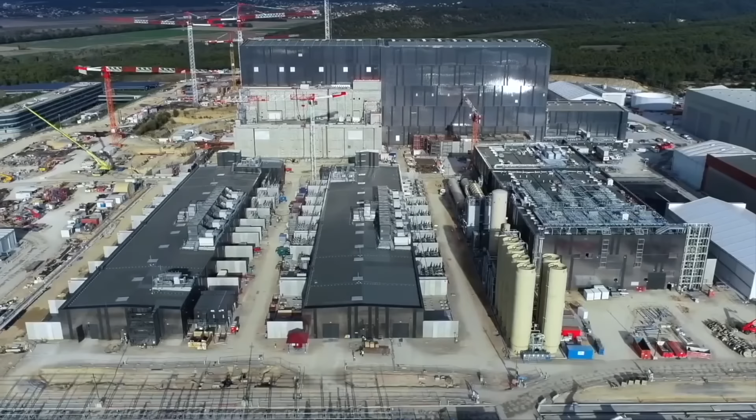From enormous nuclear reactors to international pipelines and megadams, nothing shows the power of construction quite like an energy megaproject. With massive scale and even bigger impact, these schemes quite literally power our world. Sit back, relax, and get ready to take in some of the biggest energy megaprojects from around this planet.

It's an immense project. Since 2005, Finland's been constructing the largest nuclear reactor in Europe, alongside a facility that could solve the problem of what to do with spent nuclear fuel. When you think nuclear, the Nordic nation doesn't immediately jump to mind, but if all of its planned projects come to fruition, then by the end of the decade, the country will be second only to France in terms of the percentage of energy drawn from nuclear systems.

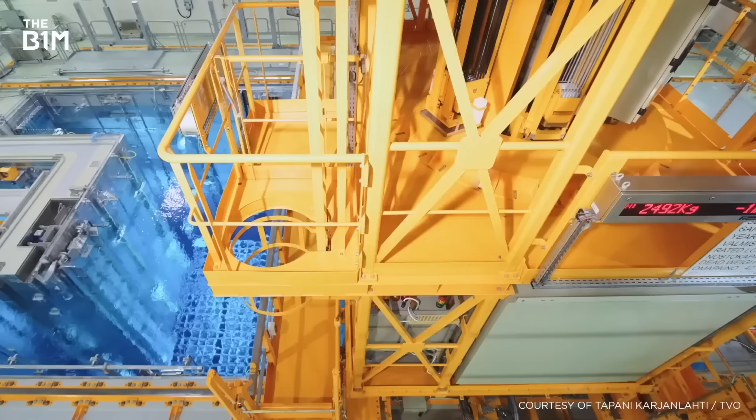After more than a decade of delays and cost overruns, 2022 will see the world's happiest country switch on one of the planet's most advanced reactors, potentially kickstarting a new age of nuclear power. Finland actually has a long history with nuclear power. Its first reactor came online in 1977, and by 1980 3 more were operational, providing a third of Finland's total energy needs.

While these reactors are among the most efficient in the world, running at a 95% capacity factor for the past decade and continually being uprated over their life cycle, growing demand and the seasonal fluctuations of other renewable sources like hydro and solar has left the country relying on imports from Russia and Sweden to make up the balance of its energy needs.

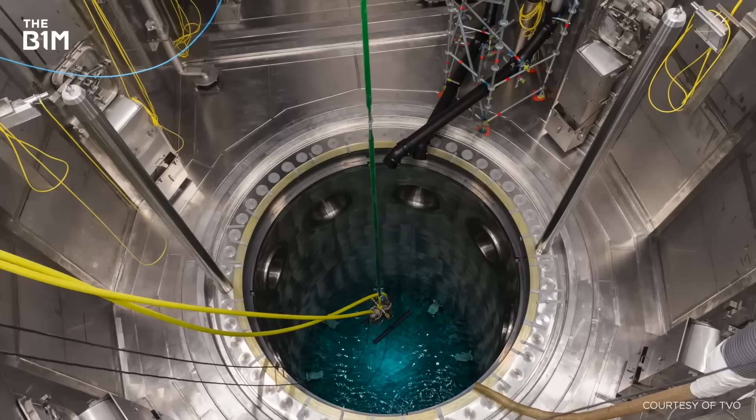To lessen its reliance on foreign energy and help meet its goal of carbon neutrality by 2035, the Finnish government approved the construction of what was meant to be the world's first third-generation pressurised water reactor, or EPR, at its Olkiluoto nuclear plant known as OL3 in 2005. With an initial cost of $3.9 billion, OL3 was to nearly double the plant's existing output and provide 14% of Finland's energy needs when it became operational by 2010.

But while OL3 was the first EPR to begin construction ahead of other next-generation reactors in France, China and the UK, complexities surrounding the design, defects in safety systems and contractual disputes led to over a decade of delays, and in 2018 China's Taishan 1 became the first EPR reactor in the world to start operating.

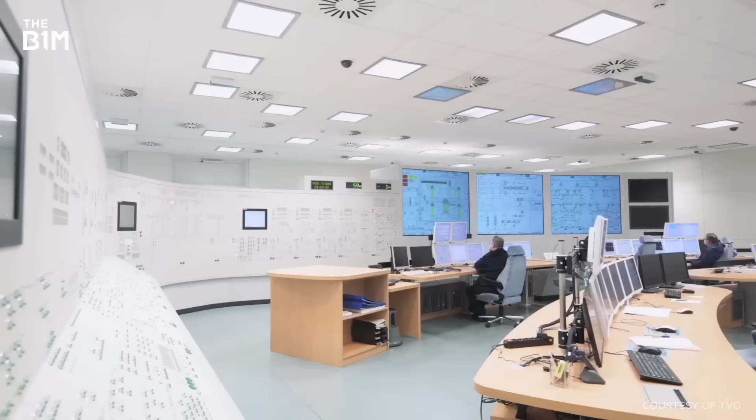Despite these delays and the cost swelling to over $10.2 billion, OL3 was granted an operation licence by Finland's Radiation and Nuclear Safety Authority in 2019, and in March 2021 116 tonnes of uranium began to be loaded into the reactor ahead of its final testing phase. Once it's connected to the grid and the reactor begins commercial production in early 2022, the countdown will be on until OL3 begins adding to Finland's spent fuel stockpile.

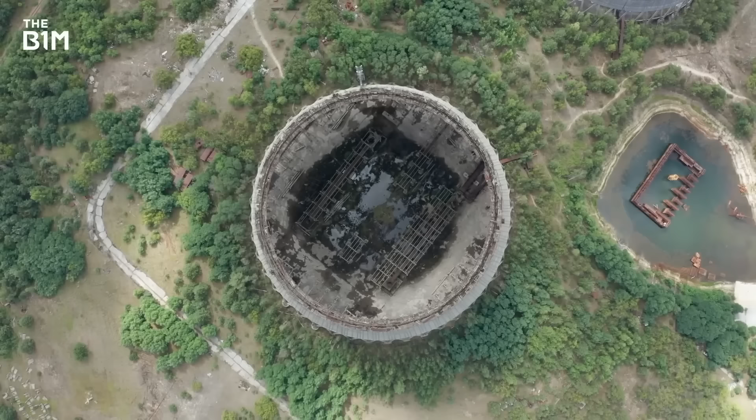Nuclear power is an incredibly clean way to produce energy, but it does create a byproduct, and it's the one problem we've yet to truly solve. After 3 to 6 years, irradiated material is no longer able to sustain a reaction as a viable fuel source, and new material must be brought in to maintain the reactor's efficiency. But while it's unable to generate electricity, spent fuel remains highly radioactive and needs to be isolated for hundreds of thousands of years to prevent it causing harm to people or the surrounding environment.

Although spent fuel can be re-enriched and re-enter the fuel cycle, the main way we currently deal with radioactive waste is to simply store it in pools or sealed dry storage facilities while it slowly decays. While these methods keep spent fuel contained, it's not a viable long-term solution, as the system is heavily reliant on mechanical and human intervention, and even under the strictest conditions it can be vulnerable to attacks of terrorism or natural disasters, the kind that led to the events at Fukushima in 2011.

With an estimated 250,000 tonnes of high-level waste already in storage around the world, and with no long-term strategy of dealing with it, many countries have chosen to completely rule out nuclear power when it comes to meeting their growing energy needs. In an attempt to solve this, since 2005, Posiva, a joint venture between Finland's two nuclear power providers, has been constructing the world's first deep geological repository for spent fuel in the billion-year-old bedrock not far from OL3.

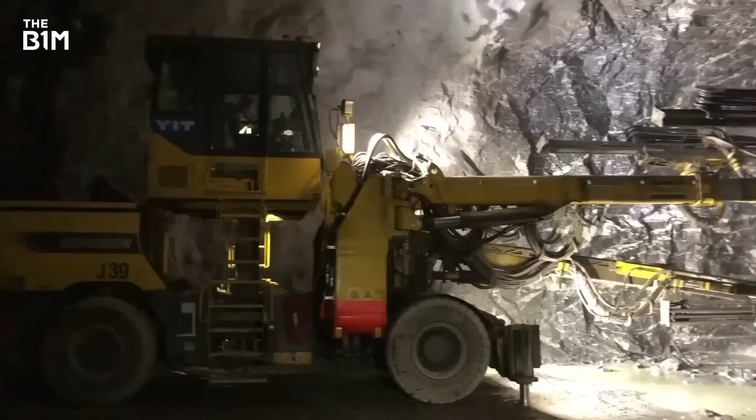Funded by charges collected from consumers through electricity sales, the $1 billion project that's due to complete in 2023 will see a series of tunnels extend half a kilometre below ground, creating a permanent disposal facility for spent fuel. Now, while burying nuclear waste might sound alarming and may cause concern to environmental groups, the process at Olkiluoto is so much more than simply burying the problem.

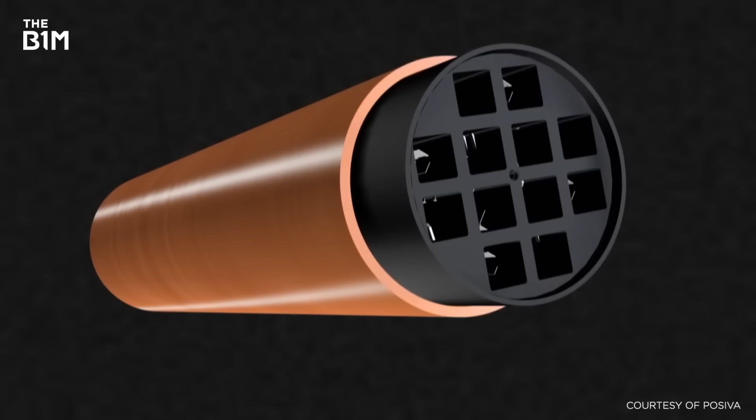Based on a Swedish disposal method known as KBS-3, irradiated material is placed into boron steel canisters and enclosed within corrosion-resistant copper capsules before being buried in individual holes and backfilled with bentonite clay, entombing it forever.

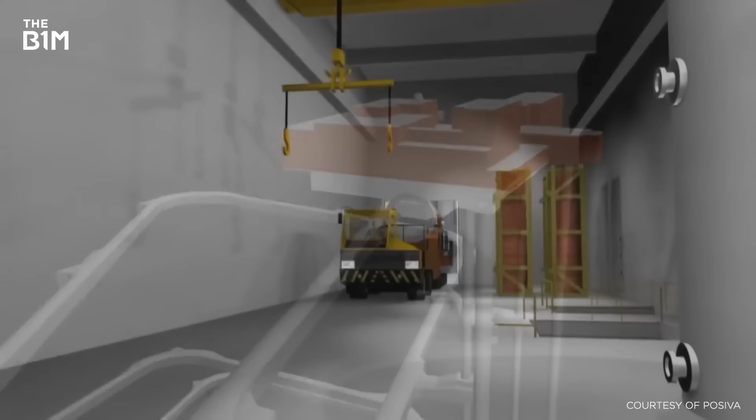Once buried, no further mechanical or human intervention is required to contain the radioactive payload, essentially eliminating one of the biggest barriers many countries have when it comes to adopting nuclear power. With the capacity to accommodate the last 50 years' worth of Finland's accumulated spent fuel, and the needs of its existing reactors until at least 2120, at which time the facility will be permanently sealed, Olkiluoto appears to provide a viable long-term solution to dealing with nuclear waste.

Described as a game-changer for the industry by the director of the International Atomic Energy Agency, the lessons learned at Olkiluoto are being shared with other countries, and regions with suitable geological characteristics are being considered for similar disposal sites. Having seemingly solved the biggest drawback of nuclear power, and with a sixth reactor already planned to begin construction next year, Finland looks set to play a leading role in the widespread adoption of nuclear technology as the world continues to transition away from fossil fuels.

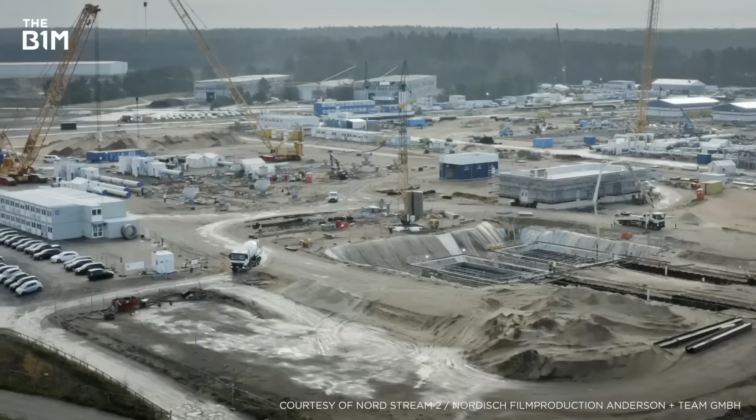If you're based in Europe like me, and you like the warm like me, then you might have noticed your heating bills going up by quite a bit lately. The continent's in the grip of an energy crisis caused by rising demand, gas supplies that are lower than normal, and a shortage of renewable power. But there's hope. The completion of this massive construction project could, in theory, help solve the issue straight away.

But this is no ordinary energy scheme. It's not a power plant or a hydroelectric dam. Instead, it's something that at first glance seems a little more, well, basic. It's a pipe. And yet it's impacting millions of people, creating tensions between some of the world's most powerful countries. One of those areas of disagreement, the Nord Stream 2 pipeline, which we continue to believe is a threat to Europe's energy security. And continuing to make global headlines. Fears are growing in Europe that it could be a cold winter. This is how a simple pipeline became one of Europe's most controversial construction projects.

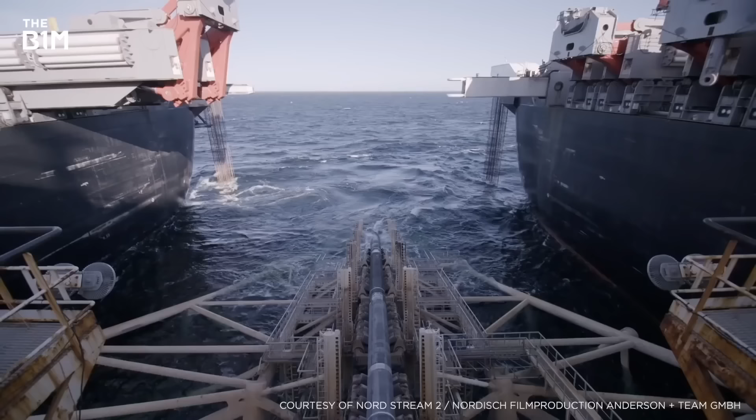Now, we know what you're thinking. Why on earth is the B1M doing a video on a pipe? Well, there's actually quite a bit more to it than that. Nord Stream 2 is a brand new pipeline that's going to bring an additional source of natural gas from Russia to mainland Europe via Germany. Having another supply of this fuel at a time when it's becoming ever more scarce sounds ideal, but there's a problem. It's all built and fully plumbed in, but they've had a bit of trouble turning on the tap, so to speak. Before we get into those details, let's rewind a bit.

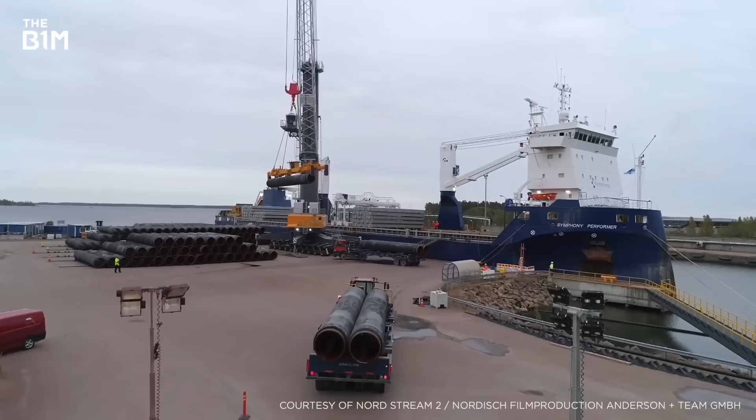Running parallel to the original Nord Stream line built almost a decade ago, the $11 billion Nord Stream 2 stretches over 1,200 kilometres and crosses the economic zones of 5 countries, making it one of the longest offshore pipelines in the world. It's formed from around 100,000 pieces in total, each weighing 24 tonnes. Oh, and there are 2 of them. It's a twin line. Once operational, it'll provide 55 billion cubic metres of gas per year, enough for 26 million homes, with the capacity to handle around a third of the EU's future import needs.

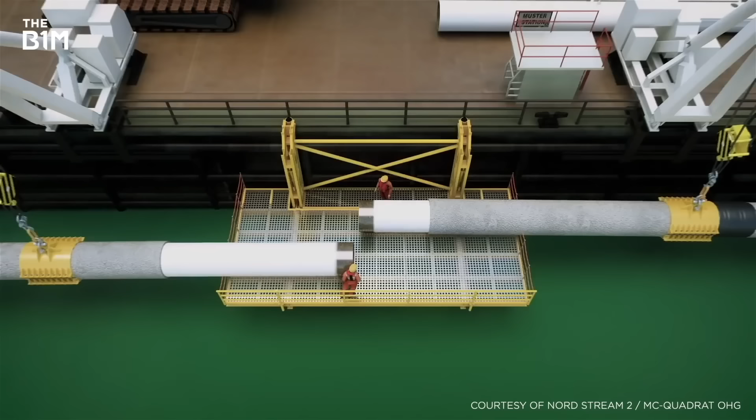Construction started in 2018, and by late 2019 it was almost done. Using the world's largest construction ship, called Pioneering Spirit, the crew was laying up to 3 kilometres of piping every day. Sections were welded and tested on board before being added to the main pipe and then lowered down to the seabed. It was also built in stages, which meant several connections had to be made at sea. Now, to avoid water flooding into the pipe, some sections had to be lifted back out and connected on the surface, in a process that's imaginatively called an above-water tie-in.

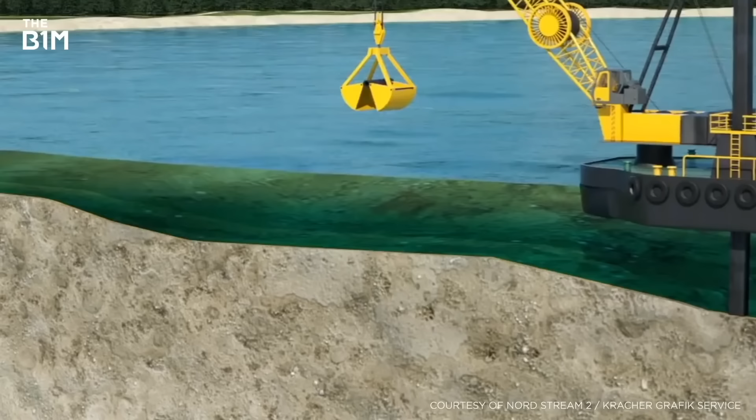But some of the most impressive work was done back on land, particularly at the German end. Here, two 700-metre micro-tunnels were constructed, connecting the receiving station to the pipeline as it nears the shore. This involved digging an entry shaft at the station and dropping a tunnel boring machine inside. That then burrowed towards the water, laying pieces of pipe as it went. Once under the seabed, the machine was dug out and removed before the land and sea pipe sections were connected. Over on the Russian side, Nord Stream 2 only had to go a few kilometres inland to connect to an existing pipeline that brings in gas from the Arctic Yamal fields.

This all means that Nord Stream 2 is considerably shorter overall than the current pipeline that goes from Russia to Germany through Ukraine and the so-called Central Corridor. It's the new route though where all the controversy is. It might be a shortcut, but it also bypasses Ukraine. That's a country that's been in conflict with Russia since 2014.

Russian troops moving swiftly to take control of military bases in Crimea. But the first shots in Moscow's occupation of Crimea have already been fired. To what America is officially calling a Russian invasion of Ukraine.

It's a country that relies a lot on the current pipelines for income, and it's a country that's set to lose out under the new scheme if Nord Stream 2 becomes a priority line. Since 2016, deliveries via Ukraine have decreased substantially, while gas coming through Nord Stream 1 has increased.

There's also fears that this could give Russia too much power and even control over the European energy system, as it would see its gas exports to Germany and the wider grid double. Some critics have warned that it could be used as a geopolitical weapon, a suggestion that Russia has denied.

I believe this is a weapon. I believe that it's wrong not to see that this is a dangerous weapon, not only for Ukraine, but for the whole of Europe.

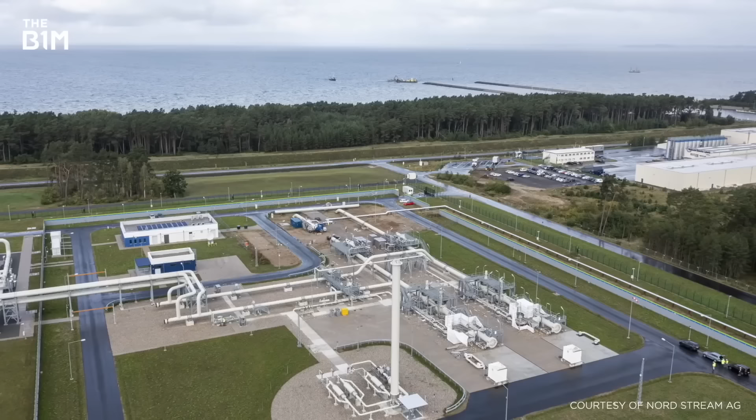A new German arm of the operating company now has to be set up before final approvals are given. All the while, those worries about the scale of Russia's influence haven't gone away. For whatever might happen next, and despite the understandable opposition, Nord Stream 2 is still an impressive feat of engineering that really underlines the impact construction can have on so many people's lives.

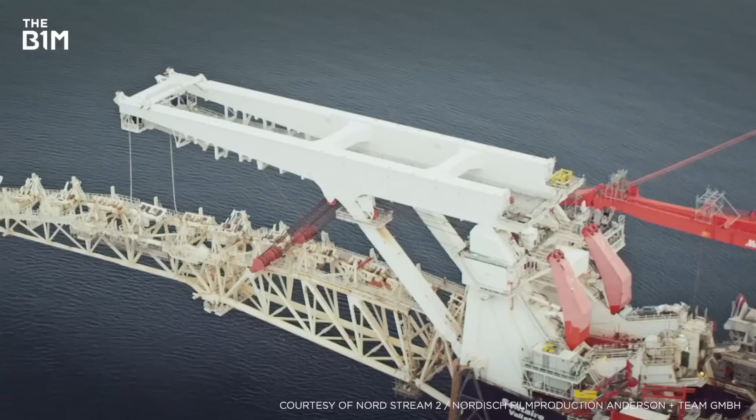Of course, many countries are currently investing in renewable energy and making big commitments to go green over the coming decades, all of which will reduce the influence of Russian fossil fuels. But until we can switch off the gas for good, and with demand still increasing, we're kinda stuck with it for now. It might not be the answer everyone wants, but others say it's what Europe needs for the time being. That is, once its flame is actually lit.

This is where they are building the largest nuclear fusion reactor in the world. Right now, I am inside the assembly hall of the International Thermonuclear Experimental Reactor in the south of France. And just behind me back there is where scientists and engineers are working to replicate what happens inside the sun.

Now, this is so much more than just another energy project. It's a $22 billion science experiment between a whole host of nations all coming together to try and change how we generate power on this planet. ITER's mission to create a new carbon-free energy source couldn't be more urgent. Global energy use is projected to nearly double by 2050, and we've got to drastically cut our use of fossil fuels.

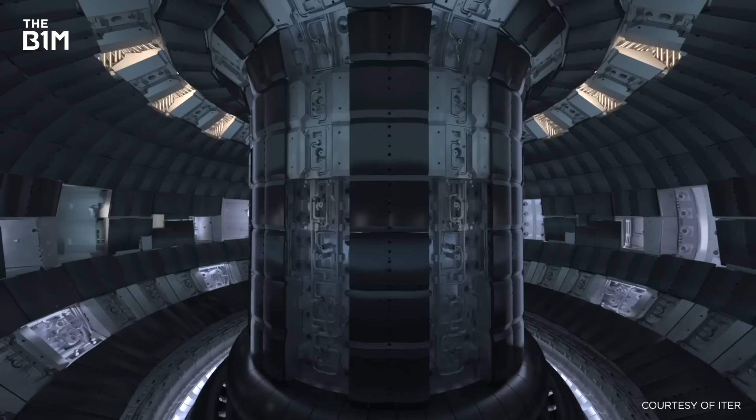Some scientists hope that controlled nuclear fusion could be the holy grail of energy, but there's a catch. As it stands right now, no reactor has ever been able to produce more energy through nuclear fusion than it takes in. ITER's aiming to be the first, and if it's a success, it could quite literally change the world.

Nuclear fusion, the energy which fires the hydrogen bomb, and the sun. Could this be the pot of gold waiting at the end of the rainbow? To provide energy which is cheap, clean, and inexhaustible.

In November 1985, General Secretary Gorbachev of the Soviet Union made a proposal to US President Ronald Reagan: form an international coalition to develop fusion energy for peaceful purposes. A year later, the EU, Japan, Soviet Union and US all agreed to design a nuclear fusion facility called ITER. Today, that effort's grown to include thousands of engineers and scientists across 35 member nations.

Scientists plan to use this 23,000-ton reactor to, basically in layman's terms, create a tiny star here on Earth that's then used to power the world. Now, if that sounds like a really big deal to you, it's because it is.

The nuclear reactors you're probably familiar with use a process called fission, where atoms are split apart and energy is released in the form of heat and radiation. That's the same process that powers those terrible atomic bombs and the nuclear power plants we have today. It's driven by elements like uranium and plutonium, which can be hard to get hold of and end up as dangerous nuclear waste. Nuclear fusion, however, is the process by which atoms are fused together using elements that are abundant on Earth, like the hydrogen isotopes you can extract from water.

Heat generated from nuclear fusion reactors can be used to produce steam that can power turbines and generators to create electricity. Once you can do that, you kind of have an unlimited supply of carbon-free energy that isn't dictated by whether it's sunny or windy. The problem is, achieving efficient, scalable nuclear fusion here on Earth is still really hard to do. You need a machine that can withstand temperatures 10 times hotter than the core of the Sun and twice the force required to launch a space shuttle. That's all to say this thing has to be really, really durable, and that's where the insane levels of concrete and engineering that you see going on here all come into play.

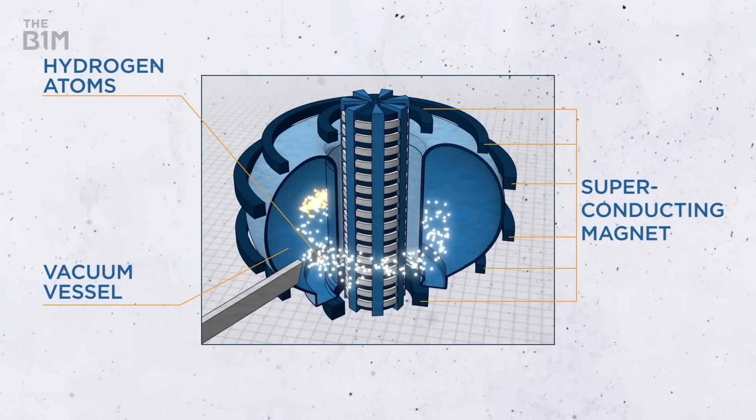Here's how it'll work. Hydrogen atoms are injected into this vacuum vessel, then a giant superconducting magnet around the machine is turned on, and the voltage strips the electrons from their atoms, forming something called plasma. It's a state of matter that's sort of like gas.

Hopefully you're still with us.

That plasma is then heated to extreme temperatures of up to 150 million degrees Celsius. The atoms then fuse together and release a huge burst of thermal energy in the process. That nuclear reaction produces 4 times as much energy as nuclear fission, and 4 million times the amount of energy you can get from burning the same amount of coal, oil or gas.

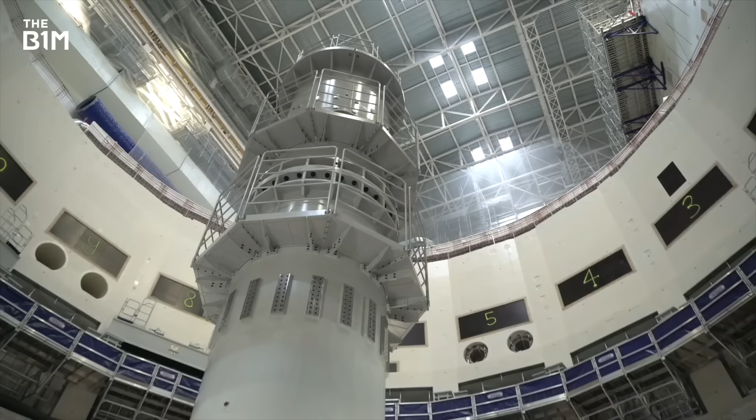The ITER tokamak will be the largest and most powerful fusion device in the world, with 1 million components and 10 million parts. Those parts are all made and assembled by ITER's member countries and then shipped here to this 445-acre site in France. It's kind of like building a Lego kit, just 10 million times more complicated.

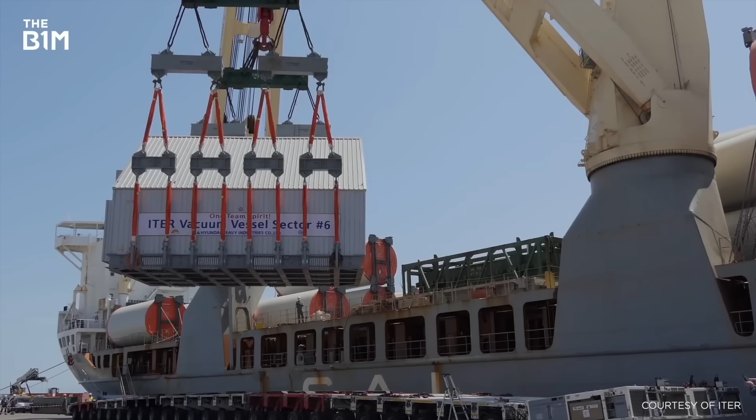I'm Colette Ricketts and I work as the Deputy Head of the Project Control Office for ITER organisation. It's my job to make sure that all the bits that are needed to put together the Lego kit that is ITER show up on time, the right colour, the right shape, the right time. I'm the Grand Master of the Lego kit.

With so many heavy components needed to make the machine, 104 kilometres of roadway have been specially modified into something that's now known as the ITER itinerary. We've built bridges, we've widened roads, we have police convoys to get our components through. It's a massive undertaking just to move a component. Everything then comes here into the massive assembly hall. Parts are put together and these enormous cranes on the ceiling above my head lift it up and over into the reactor.

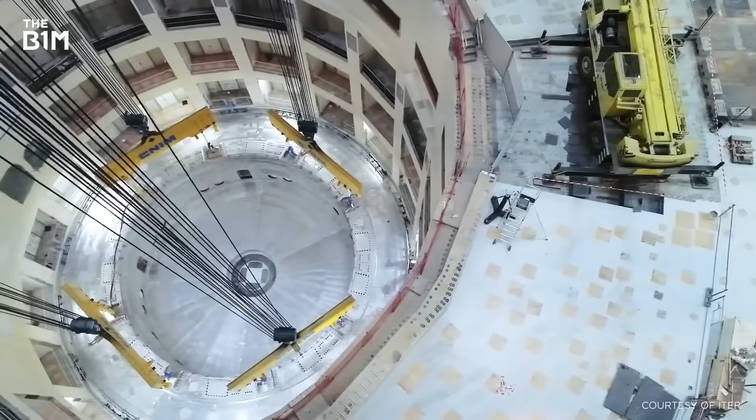At its core, we're still building the same facility we were building and was imagined decades ago. But of course, every week something changes because we're on a global platform. Pandemics, Brexit, political elections. So then we reschedule, we reorientate our programme. I spend most of my time saying, well, that was the plan, but nothing goes to plan, and this is how we're going to adapt.

Now, I'm a self-confessed construction geek, and ITER really is the ultimate construction project. If you thought getting one national government to build an infrastructure scheme was hard, try doing it with 35 nations, all with different languages, cultures and building practices.

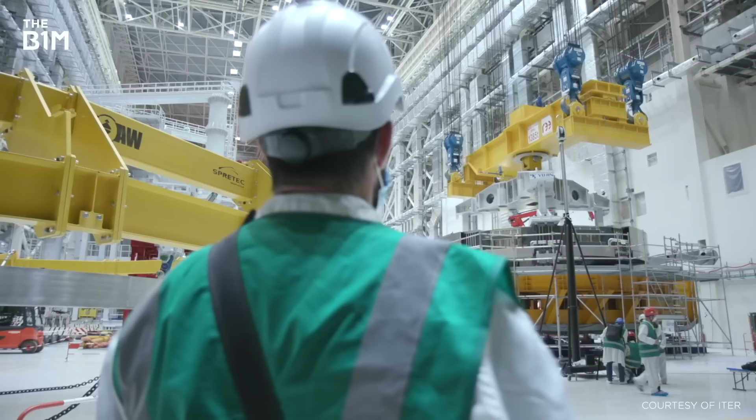So it's the coming together of these nations who recognise that there's a problem with the environmental conditions, recognise the potential of fusion to solve the baseload energy problem, and are now working together in the most amazing collaborative way. I think there's something like 45 native languages at the ITER head office. It's an amazing thing. Behind all the concrete, magnets and metal, there's a lot of different people building, shipping and assembling millions of specialised parts.

The stakes are high for ITER, and staying organised is essential. There's been a lot of money invested in this, and it's a crucial moment in our energy transition away from fossil fuels and towards renewable sources.

The immense project is scheduled to first power on in 2025, when they'll hope to create plasma. Eventually, the goal is to create, at least for a few seconds, what scientists call net energy, where more energy is produced than used. Once that small task is done, the next challenge will be to actually funnel the energy made through fusion into our existing power grids. But that's still a couple of decades away and will likely be taken up by other reactors.

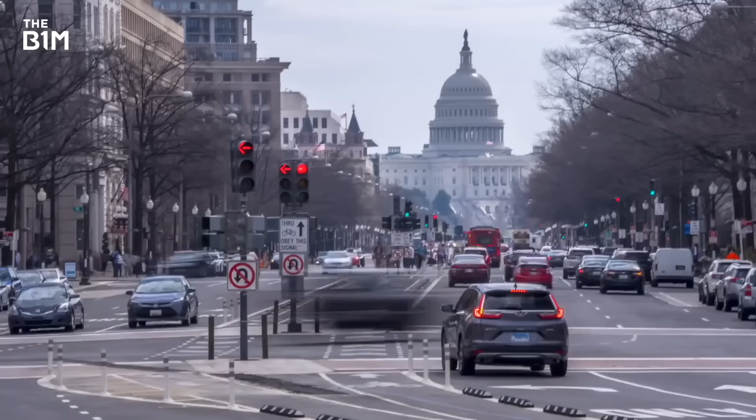ITER isn't the only group trying to harness the power of nuclear fusion. A growing number of coalitions and private companies are racing to figure out how to make fusion power commercially viable and competitive with the price of fossil fuels. The new US infrastructure bill has a number of provisions for nuclear energy research and production.

Once someone cracks the code, commercially scalable carbon-free energy production would dramatically reduce the world's dependence on fossil fuels. But it'll take time, and lowering the costs of renewable energy might help us get there first. The possibility of a future that is good for our children and our children's children with a good standard of living demands fusion. There's no other solution.

Standing here at the very centre of this reactor that could quite literally change the world is a really powerful reminder of just how impactful the construction industry can be. You know, none of this would be possible without the sector that so many of you work to create every day. Yeah, the spot where I'm currently standing in decades to come could be seen as the birthplace of a new kind of energy on this planet. I'm not sure it gets cooler than that.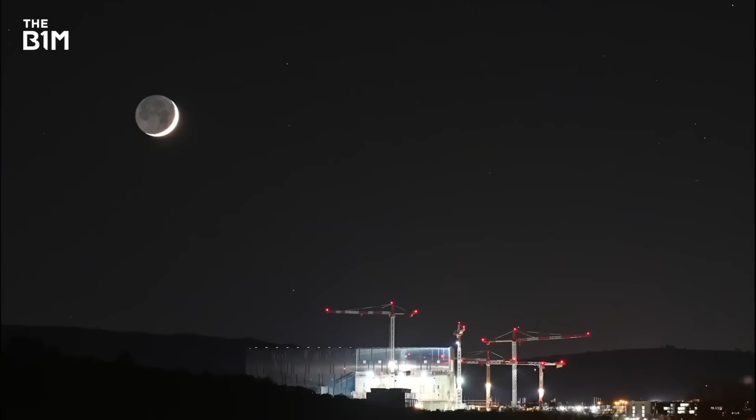This is one of the biggest energy megaprojects in North America, but you've probably never heard of it. That's because it's a type of infrastructure that doesn't get as much attention as power plants or dams, despite being equally hard to build and just as crucial to the world's power supply.

With the global energy crisis showing no signs of stopping, gas prices stuck at record highs, and shortages made worse by Russia's invasion of Ukraine, ensuring there's enough of the stuff to go around has become a bit of a challenge. But when this enormous new facility in Canada completes in a few years, it could provide a much needed new source of fuel that'll reach far and wide, as well as providing a huge economic boost. The single largest private sector investment in the history of Canada.

But in an industry where competition between countries is fiercer than ever, and with renewables on the rise, is this Canada's chance to become the next energy superpower? Or has it missed the boat? Okay, so let's get right to it. What exactly is this megaproject, and why does it require digging up such a huge chunk of this stunning landscape?

Well, it's all taking place in the small town of Kitimat, and the consortium behind it goes by the name of LNG Canada. LNG stands for liquefied natural gas. And yes, we know what you're thinking, and yes, you're right. Fossil fuels are bad, and Canada is supposedly a world leader in renewable energy. So why is it building something like this?

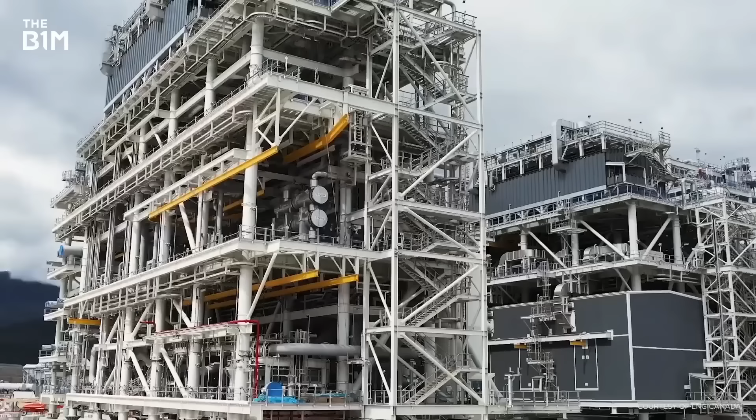Hence why Canada is now building its first LNG scheme, set to cost more than 40 billion Canadian dollars in total. A task that, as these pictures clearly show, is more than a little bit complicated. But hang on a moment, let's take a step back before we go any further. Isn't natural gas a gas, not a liquid? Yes, it'll still be a gas when it comes into this new terminal via the Coastal GasLink, a new 670km pipeline that runs all the way from the source up in Dawson Creek.

Yes, that is the name of the town where the gas comes from. But if you want to send gas to another country or continent, there's an ocean in the way, and it's too far to simply build another pipeline. You'll need special tankers like these.

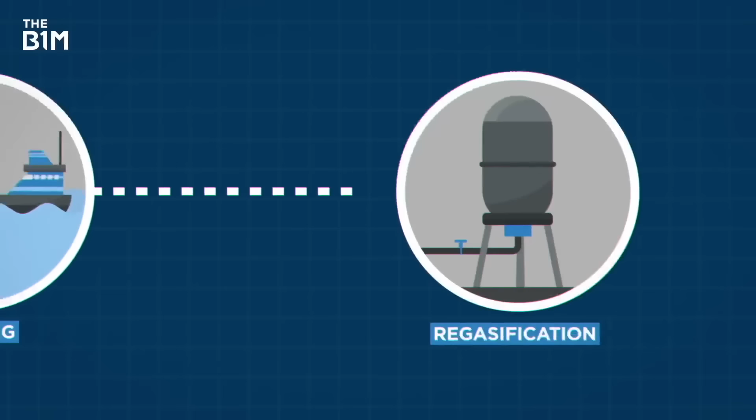To make it safe for transport, and so you can fit as much of it as possible on board, the gas has to be converted into a liquid. Then it's placed in these huge tanks and shipped over before it's turned back into a gas at the other end. It sounds simple when you summarise it like that, but the actual process is far from straightforward, and the same goes for the construction.

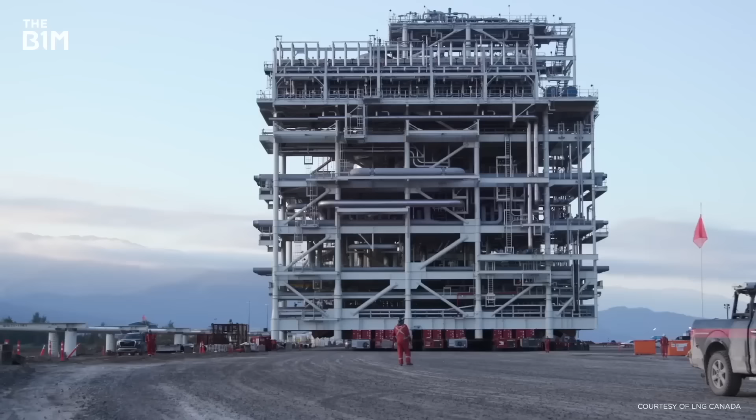Now, you'll be pleased to know that we're not going to try and explain what every single component on this site does and how it's being built, because that would clearly take some time. So instead, we're going to pick out a few highlights. Firstly, what are those things that look like huge cages covered in pipes? They're the process modules. 35 metres tall and weighing over 4,500 tonnes, this one was the first to be installed. Its job is to act as the entry point for gas coming in from the pipeline and to send it on to be treated and processed.

These giant structures were all manufactured in China and carried over on ships. To get them from the port to the site, they had to be placed on the back of large transporters and carefully moved by road before being lowered onto specially built foundations. It wasn't a one-off task either. In total, more than a dozen of these modules are going in.

Next, there's the absorber column. It's used to remove carbon dioxide from the gas before it's liquefied. Weighing over 800 tonnes and measuring 54 metres long, it's the largest single piece of equipment at the site, requiring several hours and 3 cranes to install.

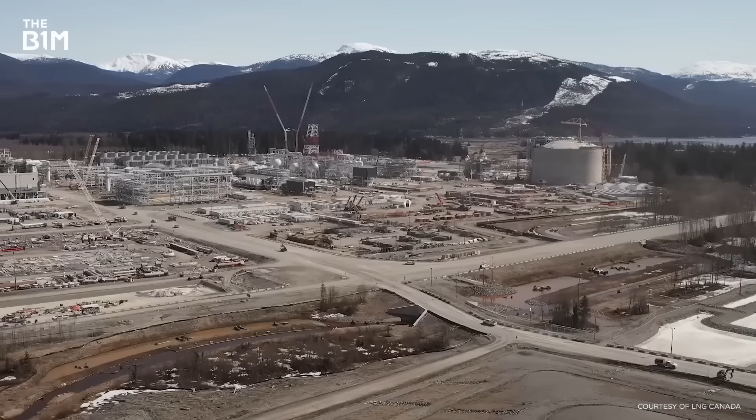But the one thing you really can't help but notice when looking down from above is this. The massive tank where the gas is stored before it's piped onto those ships. 52 metres high and 92 metres in diameter, the colossal container is one of the biggest of its kind in the world, with a domed roof that had to be lifted into place very slowly.

The lift was done using fans, which gradually pressurised the tank and raised the roof over 3 hours. Once in position, welders fixed it into place, and the air pressure inside could return to normal. With construction now over 70% complete, the terminal is set to come online sometime in the middle of this decade.

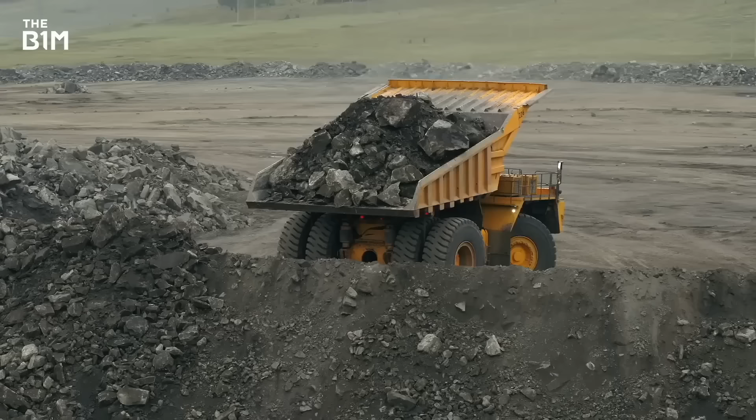And as for where all this gas is likely to go, well, Asia is the main target. It's the next closest continent to Canada's west coast. Many countries here are dependent on gas that has to be imported, and others are still burning coal, the worst of all fossil fuels. Yes, natural gas is a fossil fuel too, but it's not as bad as coal, so technically it is a lower carbon form of energy. But is it really going to get countries like China to stop using coal?

China is still importing large amounts of LNG, but they're still building coal plants. They don't necessarily use it for electricity. It's often used for domestic consumption, or it's used for powering industry. So as far as getting off coal, well, that may be one of the possibilities that may happen, or it could just be that places like China will import LNG and still burn their domestic coal because coal is cheaper.

So what about Europe, which has had to scramble over the past year to fill the gap in its gas supplies left behind by Russia and its war on Ukraine? Europe's energy crisis, one that could tilt not just the continent, but the entire world into a possible recession. According to Shell, one of the 5 companies behind LNG Canada, 2022 saw LNG imports to Europe increase by 60%. Surely then, one of the world's biggest gas producers suddenly becoming an exporter is good news for Europeans.

Well, first off, they're in the opposite direction to Asia, which would mean very long journeys to reach them. Also, despite needing more of it in the short term, Europe is pushing hard to get off fossil fuels for good as soon as possible. And right there, you have one of the potential problems with this whole project: the timing.

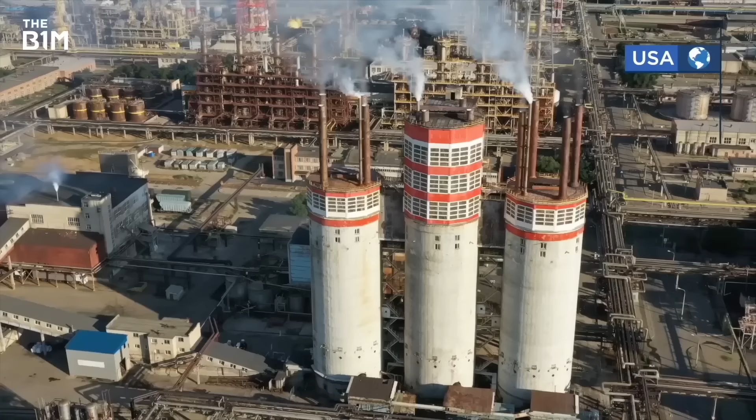When it finally gets up and running, many nations are going to be looking at much cleaner alternatives to natural gas, and the chances are that overall demand will be lower by then. Canada will also be coming up against competitors that have already been doing LNG for years. Another issue is the cost, which has grown significantly, not on the LNG terminal, but with that pipeline. There's also the impacts on local communities, the First Nations.

LNG Canada says it's working closely with them on the main site, but there have been disagreements further inland. Coastal GasLink pipeline was originally estimated to cost around $6 billion. The latest cost estimate is $14 billion.

These are Canadian dollars. And then at the same time, First Nations, the Aboriginal people of the Montney Basin, have been concerned about the impacts of drilling and forestry on their hunting and fishing rights. The industry had to make an agreement with the government and the First Nations that limited the amount of drilling in the basin, and that could push up the cost of supply as well.

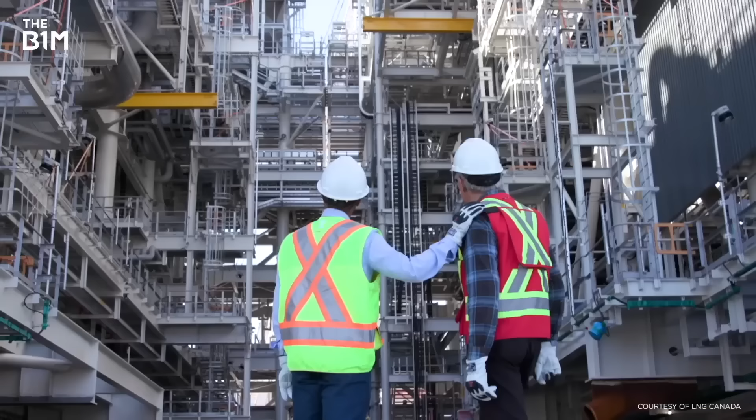All in all, LNG Canada represents something of a gamble for the companies involved, and to some extent the country. It's undeniably impressive from a construction point of view, and it's offering something that's clearly needed at the moment all over the world. But as is often the case with these megaprojects, whether it ends up being worth the cost, both financially and environmentally, remains to be seen.

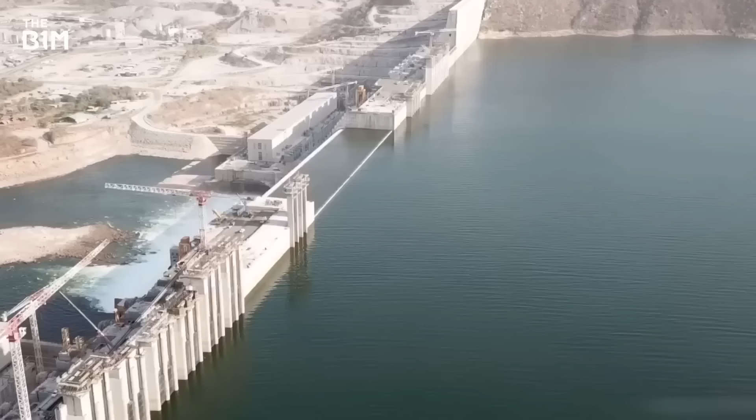This dam is absolutely huge. The reservoir behind it will be roughly the same size as London, while the dam itself will be twice as tall as the Golden Gate Bridge. Welcome to the Grand Ethiopian Renaissance Dam, an epic name for an epic feat of engineering. It's decades in the making and forms part of the country's so-called economic miracle, largely because it has the potential to lift millions of people out of poverty.

But it could also be the dangerous spark that ignites a whole new conflict in the region. Egypt, Sudan and Ethiopia are at odds over who controls the world's longest river. A fight for the Nile. This is the largest dam in Africa, so large it has its own classification. It's a mega dam. Mega what?

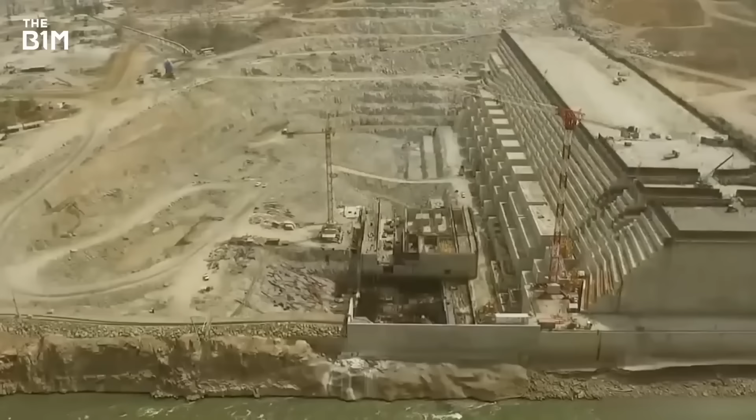Once complete, it'll produce over 5,000 megawatts of electricity, more than double Ethiopia's current output today, and its reservoir will hold 74 billion cubic meters of water. The numbers here don't get any less overwhelming. The dam itself is made of 10 million cubic meters of roller-compacted concrete and is set to include 2 power stations, 3 spillways, and a saddle dam.

The main dam itself will be 145 meters deep by 1.7 kilometers long, while the saddle dam supporting the main structure will be an astonishing 4.8 kilometers long by 45 meters high. There'll be 2 outdoor power stations on either bank of the river, with the capacity to generate roughly 2,000 to 3,700 megawatts of power.

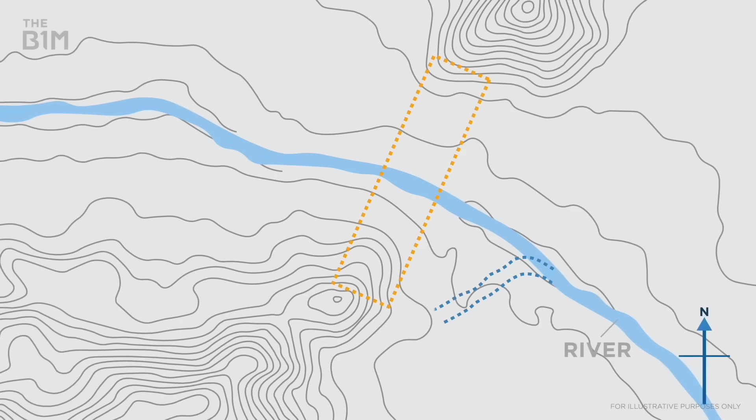The first step on the journey to build something as enormous as this kind of sets the tone for the rest of the project: the casual diversion of the Blue Nile River in 2013. Now, as dramatic as that sounds, it's actually pretty common when building dams. Here's how it works. Most dams are built over rivers, but to pour concrete you need a dry working area. So diversion channels or tunnels are formed around the side of a dam's location for the period of its construction.

If you're going through hard rock, then explosives are normally used to clear a path, while soft soils and rocks are excavated. Once there's a dry space for workers, foundations are laid. They have to be strong enough to withstand the weight of the dam and the enormous water pressures acting on them. As we said, the Renaissance Dam will be 145 metres deep, almost the height of a skyscraper, and that 74 billion cubic metres of water behind it will create a lot of pressure.

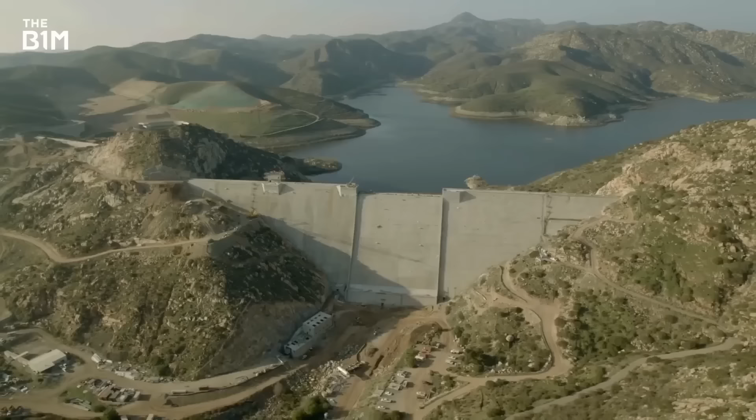Those foundations absolutely cannot leak, so the soil and rocks in the ground below the dam have to be strength tested and are sometimes removed and replaced with stronger materials. Once a dam is complete and in place, the diversion channels around it are blocked and water typically builds into a reservoir behind the dam structure. That's exactly what happened at the Hoover Dam on the Arizona-Nevada border. Water is let through openings in the dam as necessary and often harnessed for hydroelectric power.

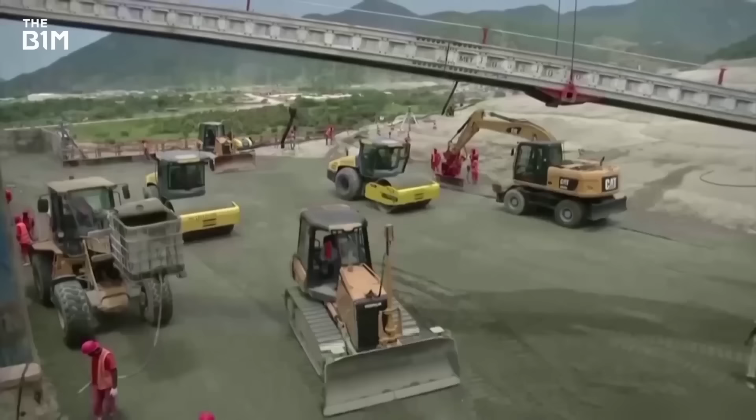The immense scale of the Renaissance Dam has likely required special on-site concrete batching plants to be established close to the worksite. They help to increase efficiency and can ensure more control over the delivery of materials, something that's essential once you've started a big concrete pour. But a lot of the construction details for the Renaissance Dam have been kept under wraps, and that's all due to the somewhat fragile political nature of this project.

You see, the dam is being built here on the Blue Nile, just 30 kilometres upstream from the Sudan border, and it's caused fierce debate over exactly who owns the Nile and the water flowing in it. Egypt's President Sisi says the Nile is a question of life, a matter of existence to Egypt.

It's worried that its share of the water will be reduced when Ethiopia starts to fill the massive dam. There is no Egypt without water. We either have water or there is no future for us.

Further downriver is Egypt, and Egypt's pretty much entirely built around the Nile. An astounding 85% of the country's water comes from just this one source, and some 95% of the country's population live within a few kilometres of this famous river. Canals from the Nile irrigate farms and support cities, agriculture and fishing.

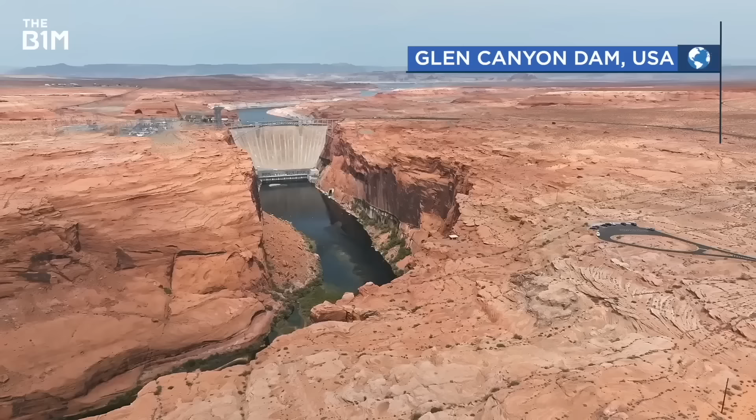The Nile has breathed life into this desert region for thousands of years, and if something were to happen to jeopardise that water source, well, the consequences could be disastrous, and Egypt knows this. Now, to design any kind of dam, let alone a mega dam with a reservoir the size of London, you need a pretty solid grasp on engineering and maths.

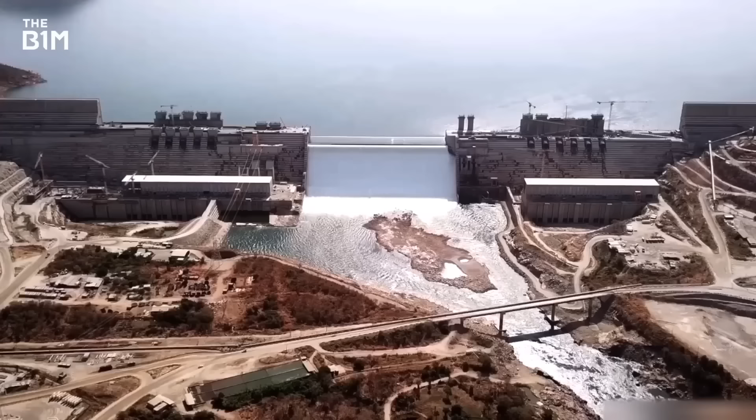For its part, Ethiopia has argued that the effects of the dam are going to be minimal on the countries that are downstream, while the benefits will be plentiful and can be shared. But the debate over who can lay claim to the waters continues. Today, talks between the countries have almost completely broken down, with no agreement met, despite the dam now being 90% complete and scheduled to be filled within 3 years. Whatever the outcome, this is a piece of infrastructure that's likely to reshape more than just rivers in the region.

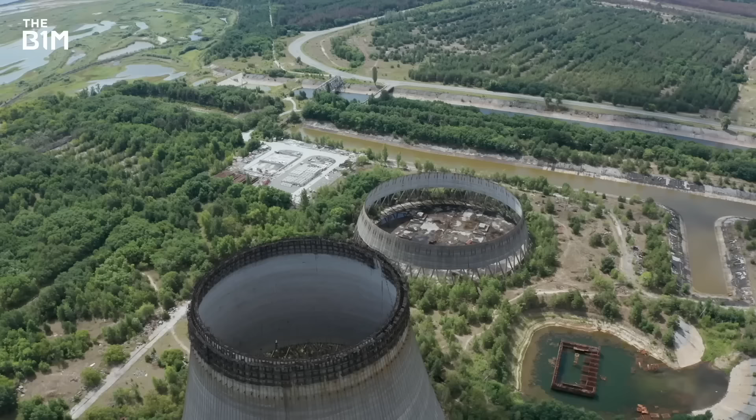It's a sight that hasn't been seen in the US for over 30 years. A new nuclear reactor nearing completion, 2 of them in fact. Yes, the country that has more of these than anywhere else has now finally started building them again, and it couldn't come at a better time. With fossil fuels falling out of favour, nuclear faces a possible comeback.

But this monster of a construction project has been a long time in the making. Costs have spiralled sharply and mistakes have been made. Vogtle is well behind its originally intended schedule, double the original budget. People didn't know how to pour concrete correctly. The design wasn't finished enough. Techniques had to be invented and then changed on the job. And yet it could still mark the beginning of an American nuclear revival that not too long ago seemed impossible.

When you think clean energy, you'll probably imagine wind turbines, solar panels, or maybe a hydroelectric dam. But what about this? That's right, nuclear power. It's not everyone's idea of clean. The errors of the past and concerns about waste have made many of us sceptical about these places and the people operating them.

Now, if you'll excuse me, my fondue is just about... There goes Albany!

But this is no joke. When the wind isn't blowing and the sun isn't shining, we need a reliable source of emission-free energy to fall back on, one that isn't years away from reality. Coal is now extremely expensive. Natural gas is now extremely expensive. Wind and solar do not replace the functions of coal and natural gas, which is on-demand power.

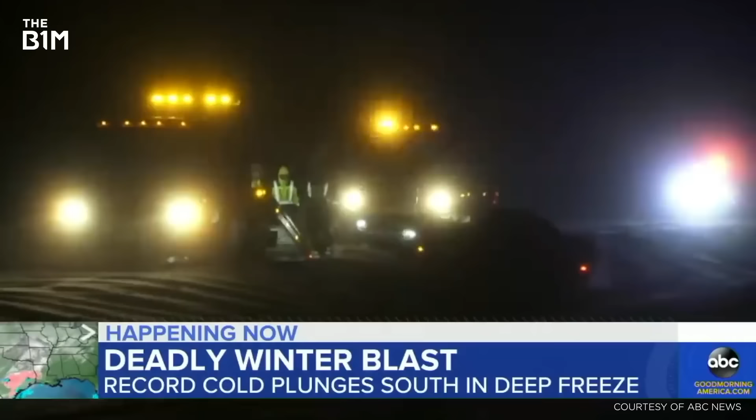Mark's a nuclear engineer and managing director of Radiant Energy Group, which advises governments and companies on nuclear energy. Even gas being on demand has been brought into question with the Texas blackouts of 2021, when we just didn't have the ability to deliver enough natural gas in very cold conditions to keep the whole grid going.

Now, we've been building nuclear reactors since the 50s, and it all started in the US. It was here that electricity was generated with a nuclear reactor for the first time, in a period when atomic power was still mostly known for weapons. The peaceful atom is here now to serve what President Eisenhower has termed the needs rather than the fears of mankind.

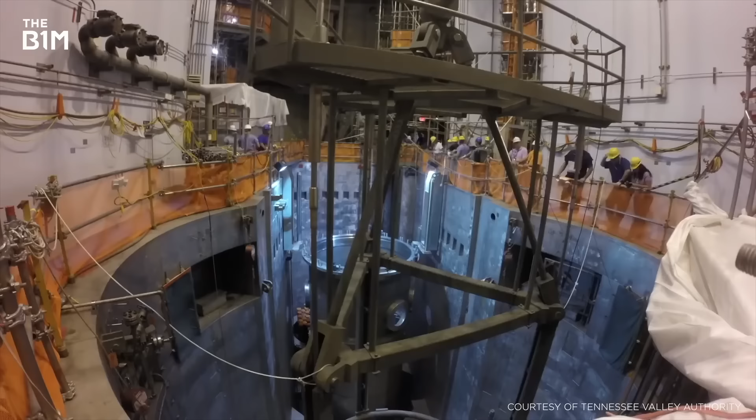Today, the US has by far the largest nuclear capacity of any country in the world, and yet it hasn't built any new nuclear plants for over 30 years. There are almost 100 reactors in operation across the country, but they were all made decades ago. A second reactor at Watts Bar in Tennessee was completed in 2016, but construction started on that back in the 1970s, so it's not seen as completely new.

Now, there are reasons for America's nuclear decline, and they apply pretty much everywhere. In short, new reactors have become extremely expensive, and they take a long time to complete, which isn't helpful when experts say we could do with more of them. These days, there are also a lot more regulatory hurdles and safety procedures to follow.

That's largely down to what happened at Three Mile Island in 1979, where one reactor in Pennsylvania had a partial meltdown and became one of the worst nuclear accidents in history. After that, nuclear's popularity began to decline, and plans to build dozens of new reactors across the country were cancelled en masse.

In a developing country, you're desperate. You take whatever power plants that you can get, whatever power plants the rich world will finance for you. But in the rich world, we got a little bit complacent, and it meant that if enough people didn't like nuclear, why go through all that effort as a national leader or as a political party? Why put up with the opposition to nuclear when you could just not build anything or build something more popular like wind or solar?

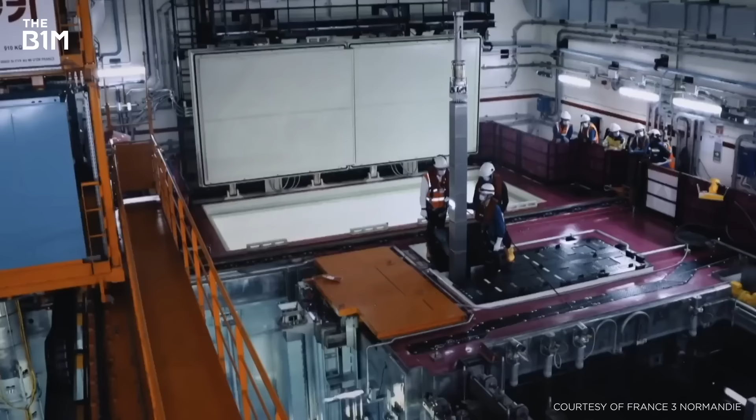It's not just the US that's finding it difficult to revive this industry. Hinkley Point C, the only nuclear power plant being built in the UK, is at least 18 months behind schedule. Even in France, which has a greater share of nuclear power than any other country, a new reactor at Flamanville is expected to cost €300 million more than first forecast.

It's fair to say the US nuclear sector has never fully recovered. The last power plant to begin construction here was back in 1978. Having any new reactors, let alone whole new plants, was starting to feel like a thing of the past. But that's all about to change. America is back in the nuclear energy industry, folks.

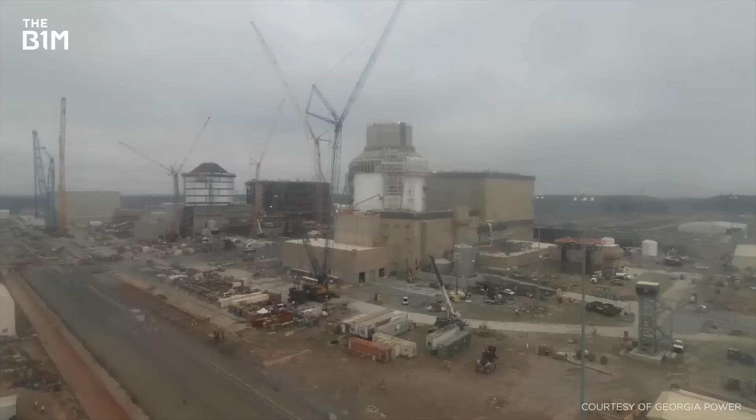We are back. America's finally getting its first new reactors in decades, built on the site of the existing plant Vogtle in Georgia, which has been home to two since 1989. Located east of Waynesboro, close to the border with South Carolina, Units 3 and 4 at Vogtle are the only nuclear reactors currently under construction in the whole United States.

Once finished, they'll provide enough clean energy through nuclear fission to power 500,000 homes and businesses for 60 to 80 years. When combined with Units 1 and 2, Vogtle will generate more electricity than any other nuclear facility in the US. The project's being managed by Southern Nuclear and Georgia Power, with Bechtel handling the construction.

As you can imagine, building a nuclear reactor involves bringing together a whole lot of components, some of them small and others very large indeed. By far the biggest piece on each unit is the CA-20 module. Five stories high and weighing almost 1,000 tons, they store used fuel, exchange heat and collect waste.

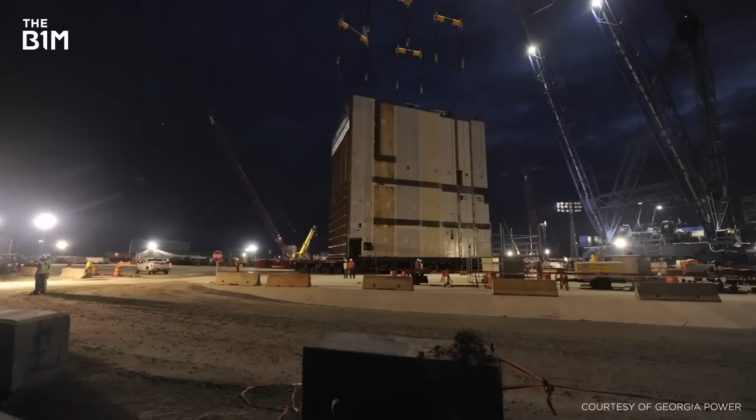Wall and floor sections were prefabricated on site, and putting the modules in place required the heaviest lifts on the whole project, using one of the largest cranes in the world. Installing the two steam generators needed for each reactor was another complex task. Assembled in South Korea, they had to be transported from the coast to the site by train.

They're 25 meters long and also had to be craned into place. So, how much has all this heavy lifting cost, and has it remained on schedule? Well, a lot, and no.

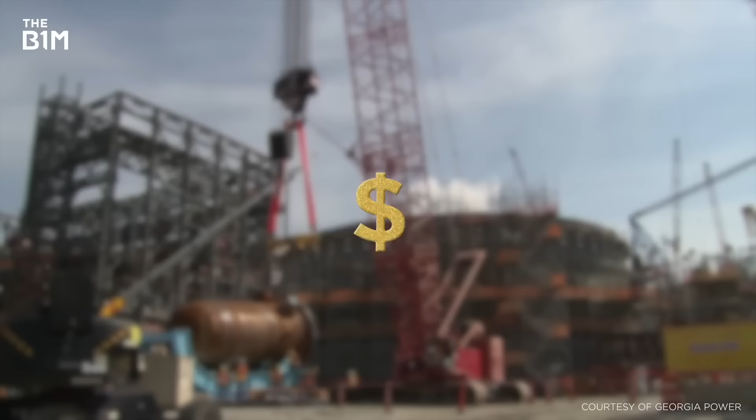Back in 2009, when the project was first approved, it was set to total around $14 billion, with a target completion date of 2016 for Unit 3 and 2017 for Unit 4. Now we're in 2022 and the work is only just wrapping up, and as for that price tag, well, it's looking closer to $30 billion. That makes it a contender for the most expensive nuclear power project ever, and it's not even an entire plant, just an extension, albeit a big one.

To be fair, a large public infrastructure project going over budget is not exactly unusual. It's kinda normal for the final cost to be somewhat higher than the original estimates, especially when the project's been running for years or even decades. But now it's costing more than double what it was supposed to, you can see why some people are a bit annoyed. As for the delays, well, a lot of it comes down to the way it's been managed.

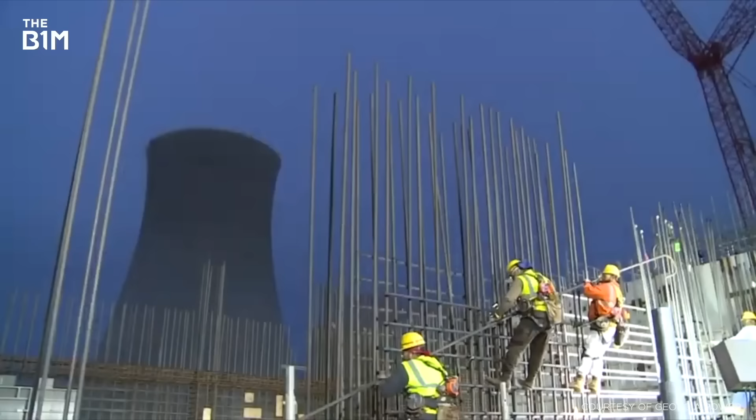The company that makes the reactors, and that was previously the main contractor, has had a part to play. Vogtle 3 and 4 are the first AP1000 units from the Westinghouse Electric Company to be built in the US. However, in 2017, the company filed for bankruptcy due to heavy losses from Vogtle and the VC Summer plant in South Carolina, where it was supplying a further 2 reactors. Although work on Vogtle 3 and 4 was able to continue during this period, a new contractor, Bechtel, had to be appointed for the rest of the build.

We forgot how to build. Now, the theory was that because several AP1000s, the reactor design that was being used, were in construction in other countries, we could learn from those countries and learn how to construct it ourselves. But with the supply chains different, management teams different, engineering teams different, we just didn't learn from the AP1000s under construction in China.

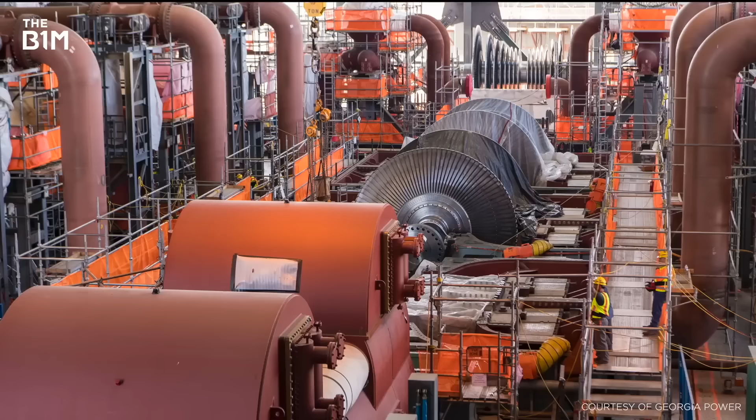Construction productivity was another challenge that's led to delays at Vogtle, along with the significant amount of remediation that's had to be done. By that we mean having to redo certain jobs, and on a nuclear reactor that can be somewhat time-consuming. According to one report, almost 100 miles of cable, around 8% of the total used, had to be cut or replaced. Another report revealed how on one part of the project, an inspection to check bolts were tightened to a specific degree didn't happen. That meant they all had to be loosened and retightened correctly before the inspection record could be signed off.

Then, in December 2021, it emerged that tens of thousands of these records had not been completed, creating a massive backlog. The tasks had been carried out, but the paperwork hadn't been done. But today, with these problems now sorted, the mood is a lot more positive, and the end is finally in sight. Construction of Unit 3 is now officially complete, and in August 2022, Unit 4 was at 96%.

That same month, Southern Company received some much-needed good news. The Nuclear Regulatory Commission confirmed that Unit 3 conformed with its regulations. That gave the plant clearance to start loading fuel and begin the startup sequence for the reactor, with commercial operation now expected in the first quarter of 2023. The plan is to have Unit 4 up and running by December that year.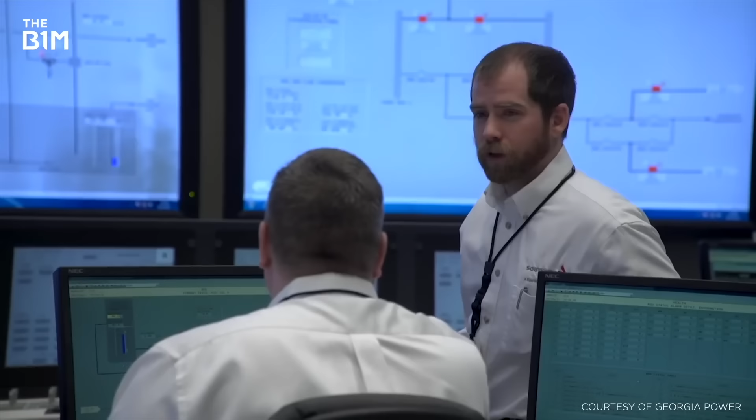It may have taken much longer and cost far more than expected, but the conclusion of this project will be a big moment, not just for the people of Georgia, but the entire US. While there's no sign yet of a mad rush to build more of these things, more will surely follow, and several are already planned or proposed, but they're yet to begin construction. Once Vogtle crosses the finish line and lessons have been learned, it could help kick these other schemes into gear.

If Vogtle is being finished in a time when the alternatives to Vogtle are extremely expensive or only a partial substitute for what nuclear power would be, the conditions are right to move on and start other large-scale nuclear plants, or to start on some new designs that people have been proposing for building around the US.

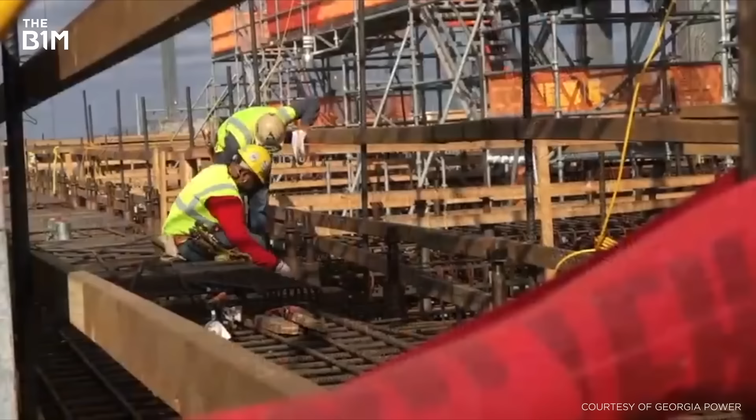We now have proof the US remains serious about this important and still quite divisive form of energy thanks to the hard work that's been carried out with this project. It proves that nuclear power has a future in America, but to what extent, we'll just have to wait and see.

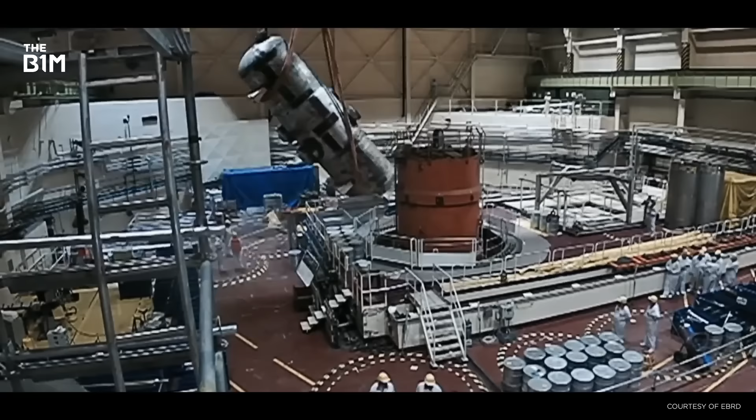What happens when a giant nuclear reactor comes to the end of its life? More than half of these hugely complex systems are now over 30 years old, and many have already been running for longer than they were supposed to. The answer sounds simple at first, you take it apart. But how do you dismantle something this big and hazardous, and why are some projects taking decades to complete? Well, let's take a look inside one power plant that sets a new standard for nuclear decommissioning to see how it's done.

If you thought nuclear power was mostly a thing of the past, think again. Right now, there are more than 400 active nuclear reactors worldwide, and that number could grow significantly. It's a type of energy that's now considered much cleaner than fossil fuels when combined with renewables, even when you factor in the waste. That's why there's been a drive to build more power plants and maintain the ones we've got. But therein lies the problem.

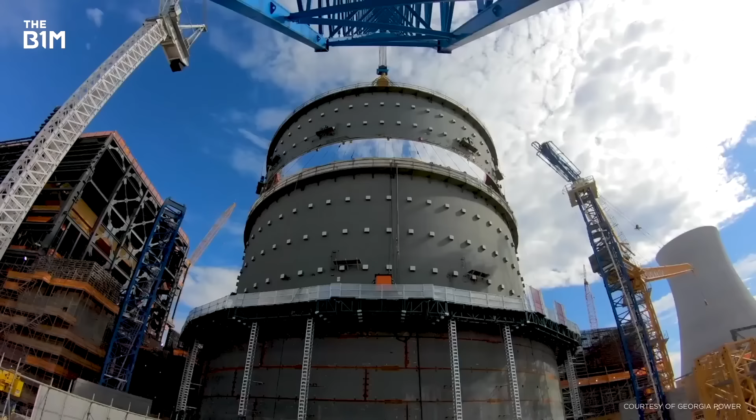By 2050, almost 50% of the reactors currently in use worldwide are set to begin decommissioning. Now, in brief terms, decommissioning is the process of dismantling a nuclear reactor or facility when it's no longer needed. It involves removing the fuel, breaking down the various structures and components, extracting all the hazardous materials, and doing lots of decontamination. Afterwards, the site can either be used to put new reactors in, or for something else entirely.

Why would a reactor be decommissioned? Well, it could be down to new regulations, running costs, or maybe it's in a country that's decided to phase out nuclear completely, like Germany or Italy. But this power plant elsewhere in Europe is being decommissioned for a different reason.

When Slovakia joined the European Union in 2004, it did so under one key condition. Formerly part of the USSR, it would have to take apart all of the Soviet-era reactors it still had in operation, which no longer met the EU's safety standards. A pair of reactors at the V1 nuclear power plant in Bohunice, which had been running since 1978, were unfortunately on the list.

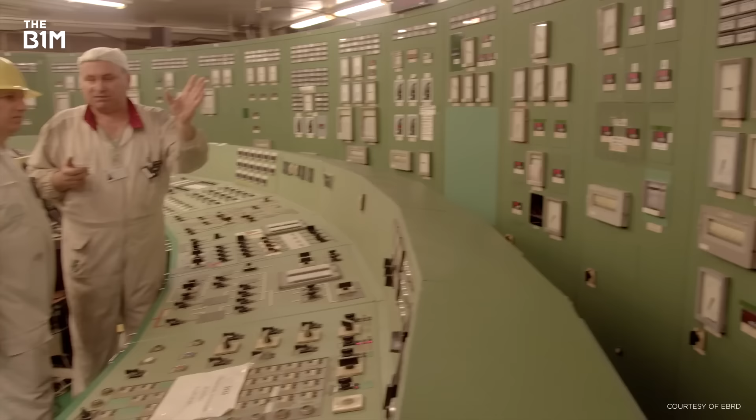They were among the first WWER reactors, a type of pressurized water design to come out of the Soviet Union. Over almost 3 decades of operation, they supplied enough electricity to power the entire country for 5 years. But after the Chernobyl disaster in 1986, the safety of early Soviet reactors became a big concern for the EU. The 2 units were switched off in 2006 and 2008. Decommissioning began in 2011, and by 2022, both reactors had been fully dismantled.

As well as being paid for by Slovakia, 7 other countries have contributed to a support fund managed by the European Bank for Reconstruction and Development. In total, the project is expected to cost around $1.3 billion and is being carried out by Slovakia's state-owned nuclear company. Now, decommissioning is necessary, but still, $1.3 billion isn't cheap.

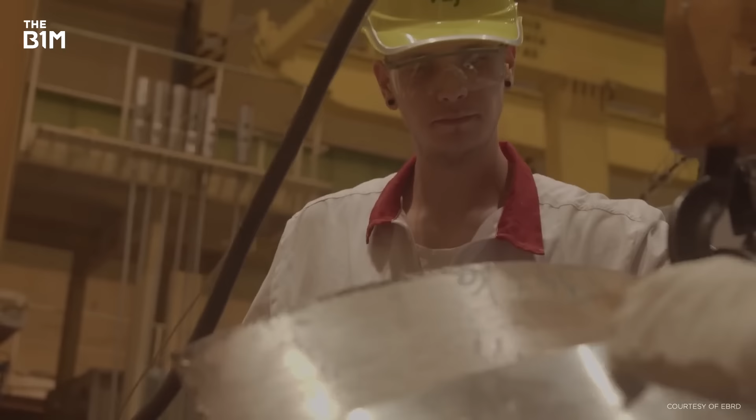Now, let's get back to those nuclear reactors and find out exactly how they dismantled them. The good news is that we're not going to go over every single nut and bolt because that would take some time. Instead, here's a summary of the key phases. First up was the removal of all the systems and buildings that were no longer needed to support the dismantling of the remaining equipment. These included the turbines, the transformers, and the switchboards.

At the same time, radioactive waste from the operation of the reactor was processed. More on that in a bit. Then, after a few years of this, work began on demolishing some of the structures that are more visible from the outside, like the cooling towers.

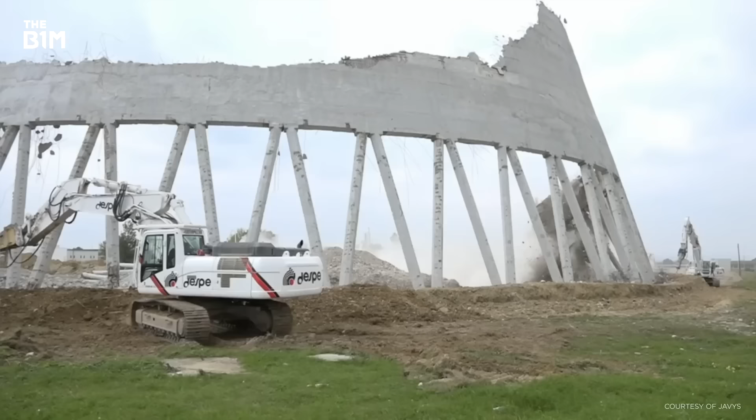They were 120 metres tall, and there were 4 of them, leaving behind 50,000 cubic metres of concrete, most of which was recycled or used to backfill the holes.

Next, it was on to stage 2, which is where we find the really interesting stuff, starting with arguably the most critical component of all, the reactor pressure vessel. Inside this is where you'll find the coolant, followed by the core itself. Yes, that's by far the most radioactive section of the entire plant, where the atomic fission takes place, creating the heat that powers the whole system.

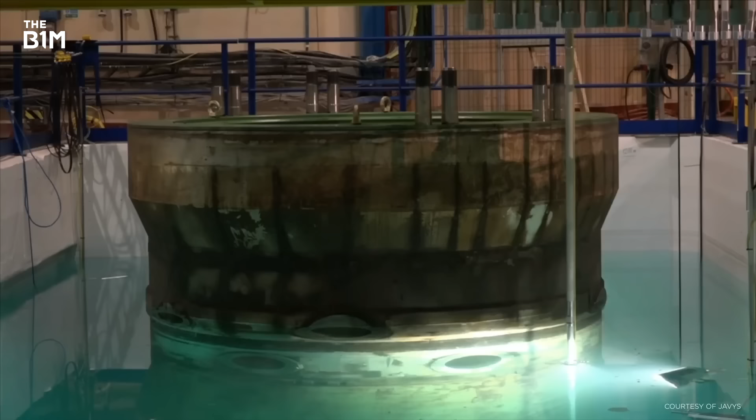A giant crane was installed to remove the vessel from the reactor shaft before it was placed into a special pool. This is so it could be taken apart remotely beneath the surface. Why? Well, because this part of the job involved segmenting highly radioactive waste, and doing that underwater meant workers were shielded from the radiation.

But before these pools could be constructed, they had to make space for them, and that meant removing the steam generators, which required more heavy lifting. Believe it or not, these are where steam is produced that's used to turn the turbines, which then generate electricity. At Bohunice, the generators were almost 12 metres long, weighing 145 tonnes. And there were 6 of them on each reactor.

Each one had to be transported across the facility to the former turbine hall where they were fragmented, in other words, chopped up into pieces. Massive circular saws were needed to slice through the 140mm thick steel casings and the more than 5,000 heat exchange tubes inside each one.

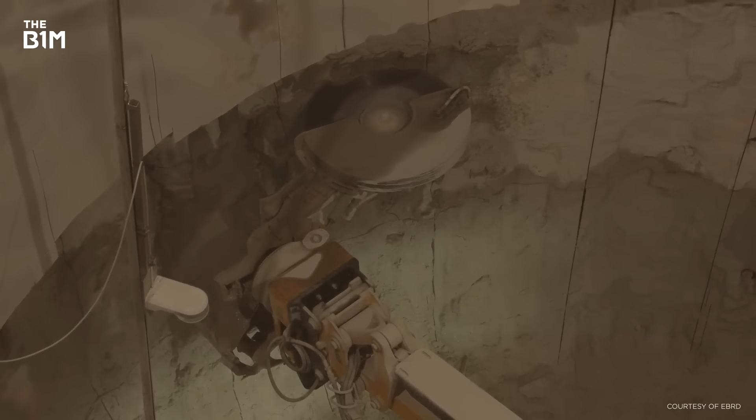But even with the reactors taken out, the shafts left behind also had to be broken down. That's because the concrete had become radioactive as well. The solution was to cut it into blocks, smash those blocks up with a hydraulic hammer, and send the rubble away for storage. Of the more than 800,000 tonnes of material that had to be sorted through, radioactive waste amounted to less than 1%, albeit that's still quite a lot when you do the maths.

So how did they get rid of it? Well, the answer was by sending it to the waste treatment centre that happens to be on the same site. Here, the waste is either separated, incinerated, compressed, or a combination of all 3 before it's packaged up and placed in containers. These are then sent off to a repository like the one at Mochovce to the east, where the waste is sealed in reinforced concrete boxes surrounded by multiple barriers.

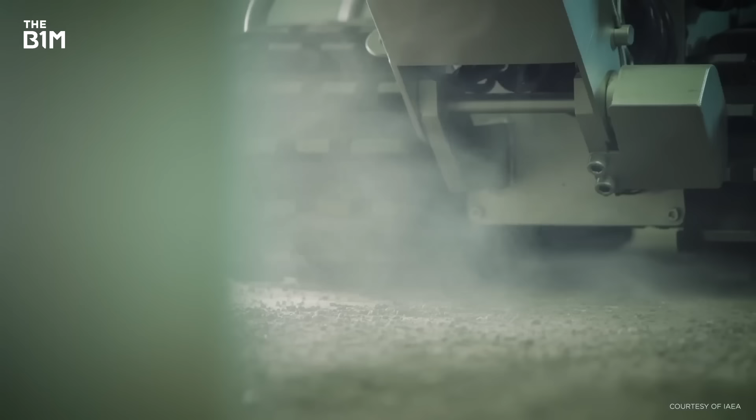As well as storage facilities like this, there are also fuel reprocessing plants across Europe which also have to be decommissioned when the time is right. France has one of the biggest at La Hague, which is currently going through the process. What are the differences between this and a reactor site? Well, because there's a lot more radioactivity to deal with here, a lot of the cleanup is done remotely via operated vehicles and robotic equipment.

Where humans are allowed inside, contamination is everywhere, including on the walls. To remove it, special resins are applied to the surfaces, which are then peeled off, bringing all the nasty stuff with them. Back at Bohunice, the plan is to have the entire site cleared so it can be reused for non-nuclear industrial activities by 2027.

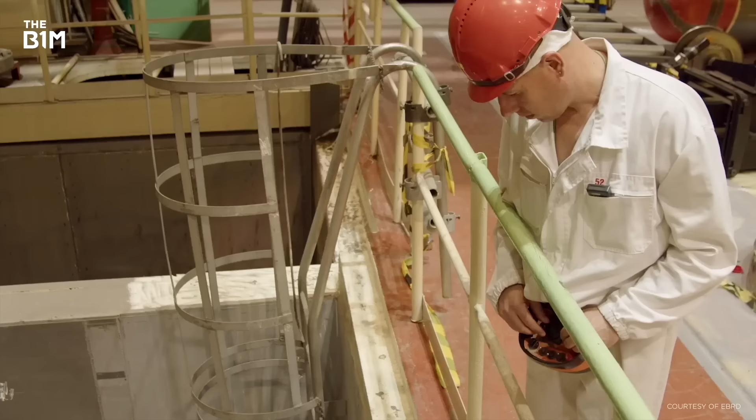In the meantime, because it became the first plant worldwide to decommission a reactor of this type, its team of experts are now sharing their experiences. With countries from Armenia to Uzbekistan now planning similar projects, learning lessons from Slovakia could help give them a big head start.

Overall, decommissioning is an immense job, one that's been made a lot harder by the fact that most reactors weren't built with this step in mind. But things are starting to change. Some countries like Canada have now taken steps to ensure that any new facilities are designed with end of life as a priority instead of as an afterthought.

Then there's the rise of small modular reactors, an advanced and compact new alternative to traditional reactors, which many consider to be the future of energy. They can be installed and crucially disassembled far more easily than the ones we've just seen, although they're yet to be fully adopted. So while decommissioning is a huge hassle at the moment, that might not be the case for much longer, which is just as well, because if nuclear is to become the major source of clean energy that many expect it to be, we're gonna need to plan ahead.